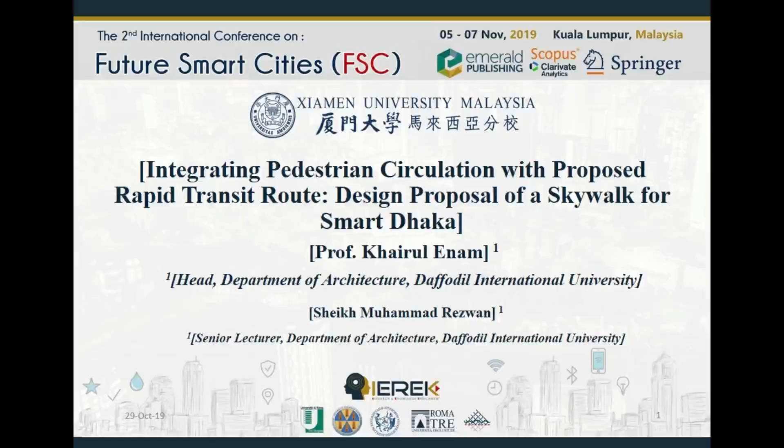We are presenting our paper, Integrating Pedestrian Circulation with Proposed Rapid Transit Routes: The Design Proposal of a Skywalk for Smart Dhaka. Dhaka metropolitan city has been developed as an unplanned city.

About 40% of its area is unplanned. Dhaka is the most densely populated megacity in the world, and Dhaka is among the least livable cities in the world, in the view of some experts.

As a result, the traffic speed has fallen to 6 km per hour, eating up about 3.2 million working hours per day. Finally, the result is that Dhaka city is going through a low productivity phase.

To improve the situation of traffic congestion, the city authority has taken some development works, like introducing metro rail, BRT or bus rapid transit, elevated expressway, and numerous flyovers to ease vehicular traffic congestion.

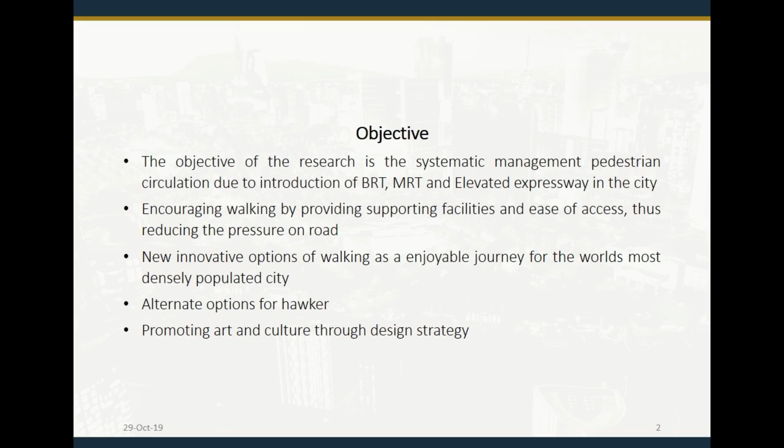What can be the achievement of cities and the quality of life? One of the essential features is how people move around them. Every trip begins and ends with walking.

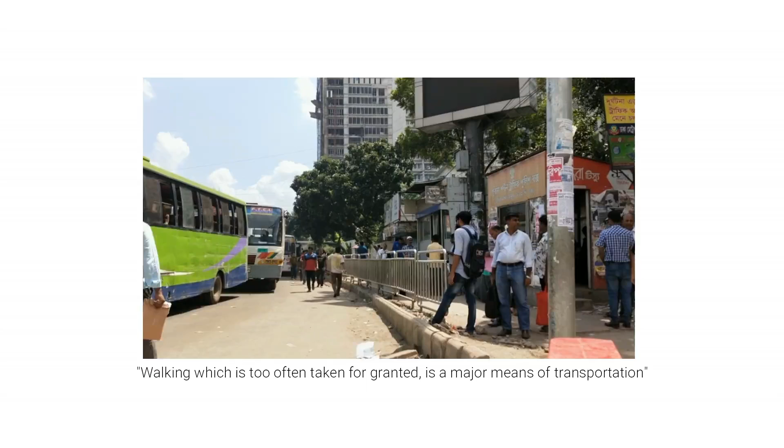Walking, too often taken for granted, needs to be considered as a primary focus among smart city features to see transformative change in towns and cities, many of which suffer from a legacy of being designed around cars. Besides health benefits, there are economic benefits, lowest carbon emissions, and it is the cheapest and most reliable mode of transport.

A skywalk is a type of pedestrian walkway consisting of an enclosed or covered footbridge between two or more buildings in an urban area. In North America, skywalks are usually owned by businesses.

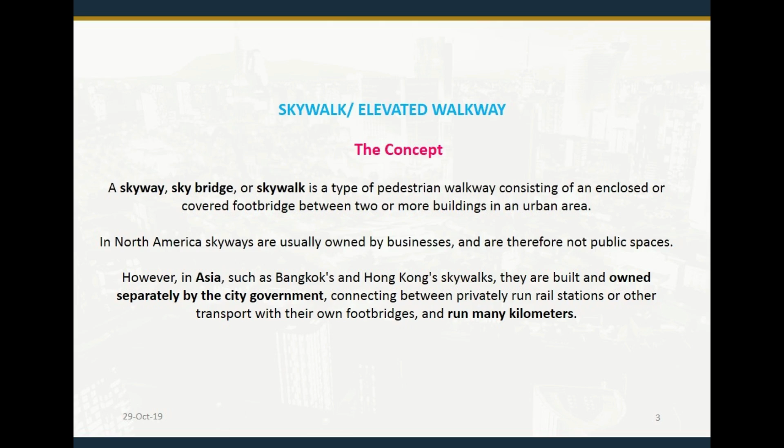However, in Asia, such as Bangkok, Hong Kong, Mumbai or Calcutta, skywalks are built and owned separately by the city government, connecting privately run rail stations or other transport with their own footbridges, running for many kilometers.

For the case study, we have chosen two skywalk examples: one in Canada and another in Asia, in Hong Kong.

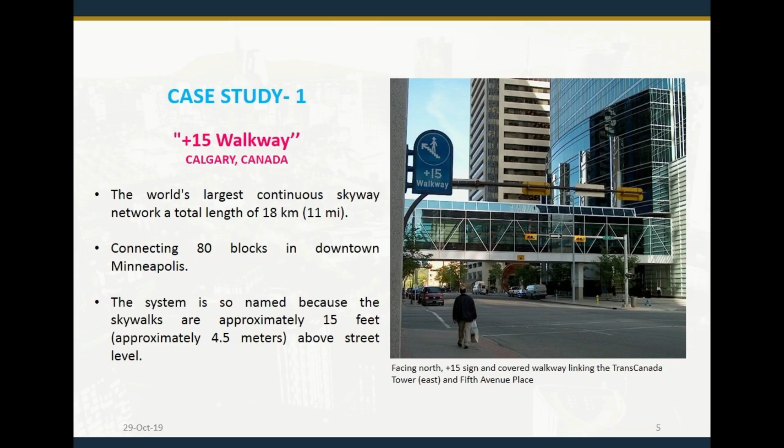The world's largest continuous skyway, Plus 15, is 18 km in length and connects 80 blocks in downtown Calgary, Canada. Within this network, 59 enclosed bridges connect dozens of downtown Calgary buildings. The central core of the system is a series of enclosed shopping centers and the city's flagship department stores.

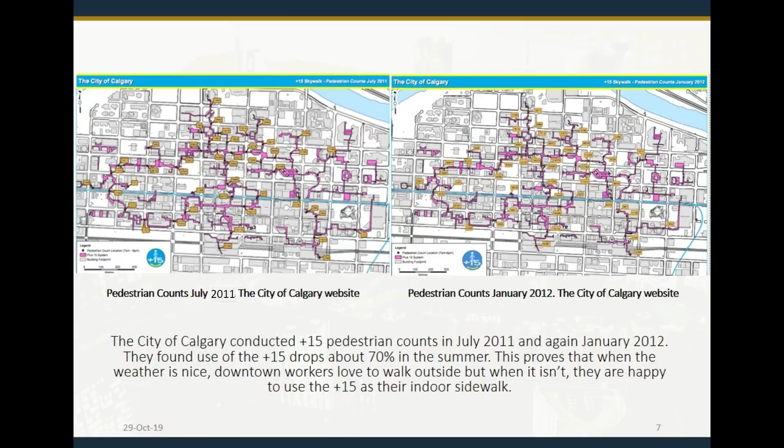Pedestrian counts in July 2011 and again in January 2012 show a 70% drop in users in the summer, which proves that when the weather is nice, downtown workers love to walk outside, but when it isn't, they are happy to use the Plus 15 as their indoor sidewalk.

The Central Elevated Walkway in Hong Kong is an extensive footbridge network spanning Admiralty, Central, and parts of Sheung Wan Harbour. The system was built in phases by the Hong Kong government and various developers, and has escalators and staircases for access. Parts of it are air-conditioned.

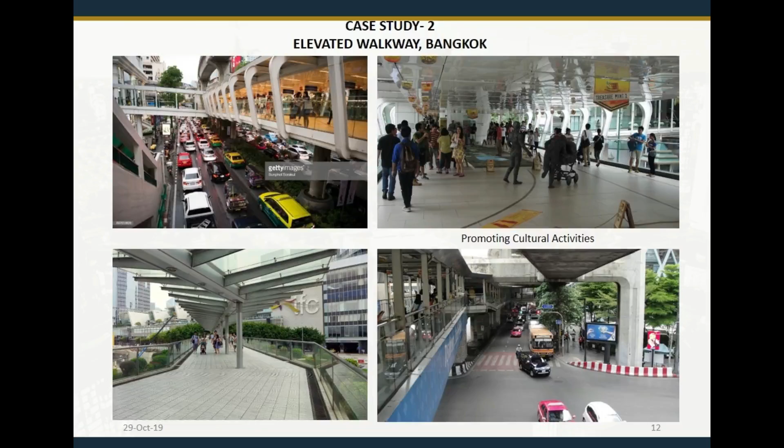There is a lot of debate about the negative impact of skywalks on urban areas, mainly negative impacts to street activities and reductions in property value at ground level, promoting consumerism and demanding more research into the impact of skywalks in developing countries. Researchers are working on this issue to make skywalks into public spaces. Our research will add another dimension to this effort.

If we now look at the BRT and MRT proposals in Dhaka city, we see there are 5 MRT and 2 BRT lane proposals in the revised strategic transport plan, to be completed within 2025 and 2035.

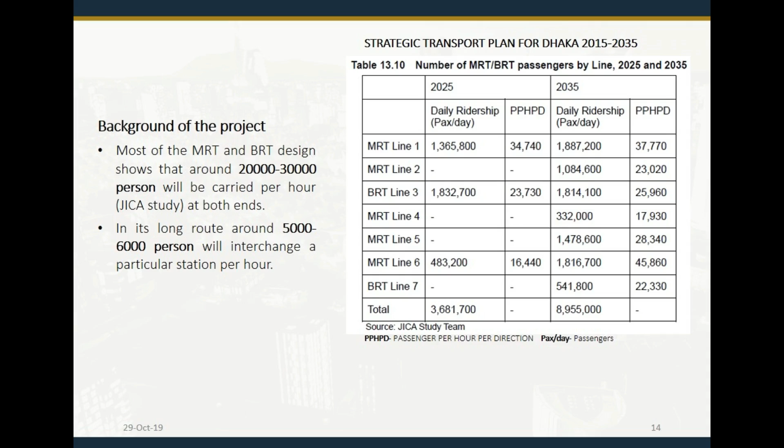A Japan International Cooperation Agency (JICA) study shows that 20,000 to 30,000 persons will be carried per hour at both ends of the MRT route. Along its long route, around 5,000 to 6,000 persons will interchange at a particular station per hour.

The design of this MRT station shows that all the passengers will come to the footpath, which is accidental because of our narrow footpaths and encroachment of the footpaths.

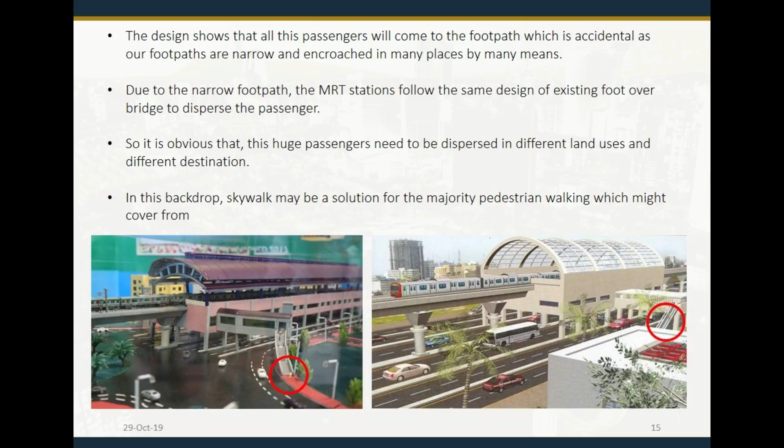Due to the short space in footpath, the MRT station strangely follows the same design of existing footover bridge to disperse the passengers. A highly used footbridge in Dhaka city carries 1,000 passengers per hour, according to the Daffodil Urban Studio Study in 2018.

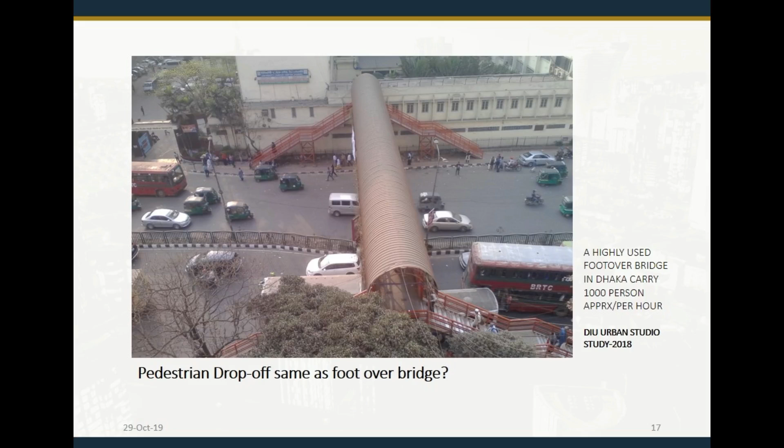So it is obvious that these huge numbers of passengers need to be dispersed in different land uses and different destinations. In this backdrop, a skywalk may be a solution for the majority pedestrian walking, which might cover from very short distance to long distance.

Now, if we come to our study area in Newmarket, Nilkhet area, we shall see there is a proposal of 10.5 kilometer long 6-lane expressway, which will be constructed over Mirpur Road. The area is famous for shopping, especially for ladies' garments, fabrics, knitting accessories, and people from all around Dhaka and even the suburbs of Dhaka come here for shopping.

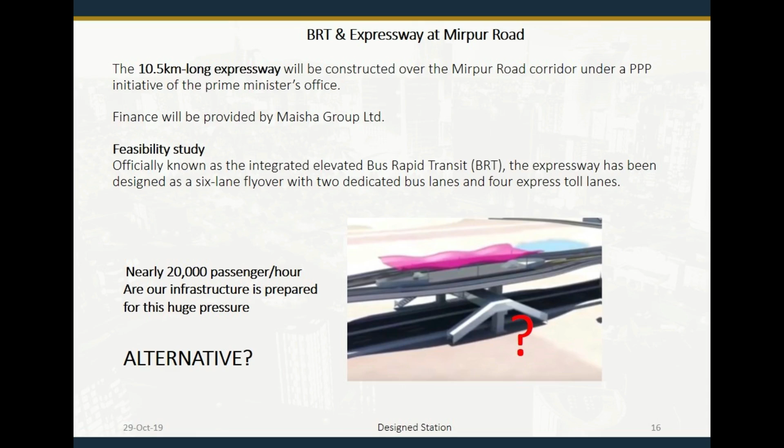There are many educational institutions, public university and colleges within 1 kilometer radius. The station is supposed to be at Nilkhet node, so the existing area needs to be analyzed.

So students of the Daffodil International University started surveying the area for 1 week in the month of September, and 12 students were involved in photograph taking, video documentation, interview, structured observation, etc.

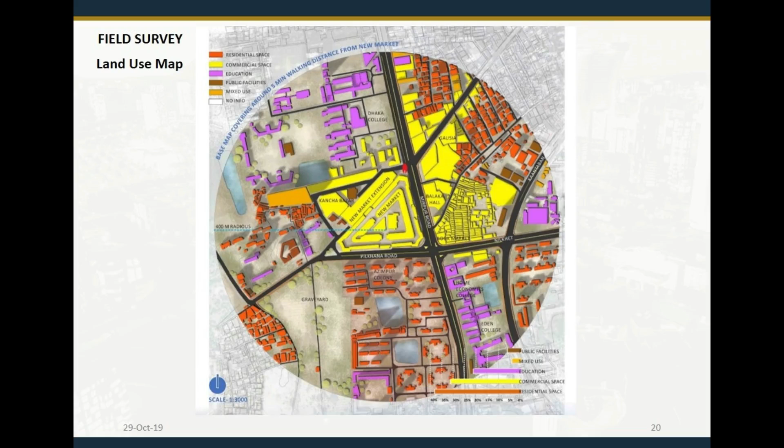Land use map of the area shows that the dominant land uses are residential, shown in orange color, commercial in yellow color, and institutional in violet color. So the shopping area entrance from the residential colony and educational institution should get priority during the proposal phase.

The traffic analysis shows that the primary road is over pressurized due to the huge pressure of cars. Newmarket has no car parking, so cars park on the street side, and drop off and pickup happen on the same main road. The whole study area is crowded with street hawkers or vendors.

The adjacent shops along the street rent this front space to the hawkers. The footpath becomes overcrowded from afternoon till 8 p.m. If you look at the image, you shall see the density of population on these footpaths.

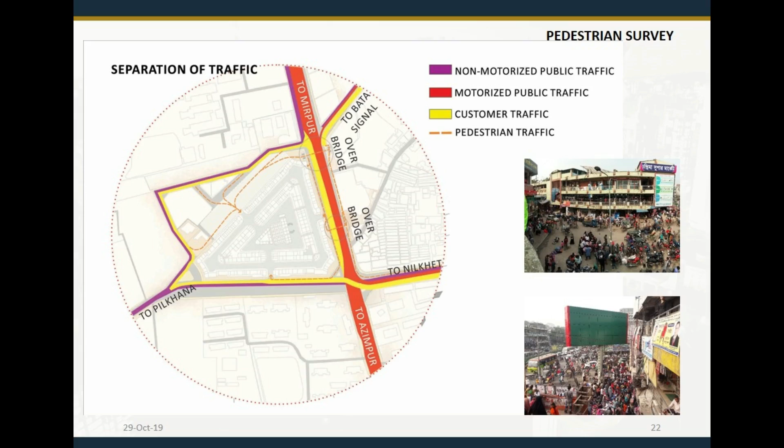So if we again disperse the MRT passengers onto this footpath, then what will happen? We can see a proposed condition after the MRT is done. Different sexual incidents also happen within this footpath with the girls because of this clumsy situation.

Though hawkers is a political or social issue, in the design phase, if something can be done for them, it will ensure more value to this project.

We are proposing a Skywalk, which is very simple, and it could be linked with any other shopping areas or all the shopping areas. It could be linked with that, and people can move easily from one place to another without crossing any road.

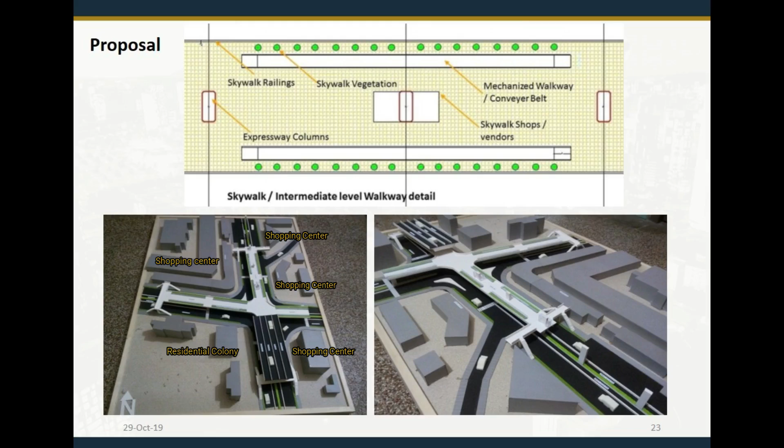In Canada, Thailand, and the USA, skywalk has been implemented as the best solution for pedestrians.

The proposal of the Skywalk is trying to integrate the MRT and BRT Expressway. The huge columns which have been used as a structural member can support it without extra columns. We are using the metro and BRT expressway columns as a support, so that no extra column is required for that.

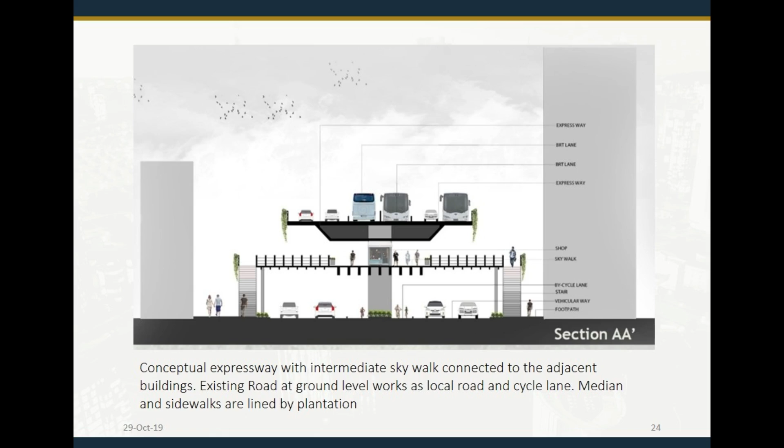To do that, a little change will come in the design of the expressway columns. It will need an extra 9 feet height to accommodate the skywalk. The skywalk height will be at the same level as the footover bridges.

The moving walkway and the fan can be provided in the skywalk for comfortable journey of the elderly people and children.

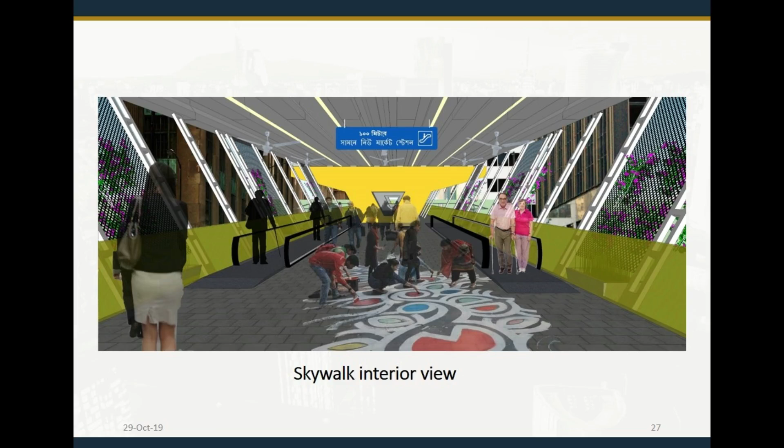The skywalk can offer a vibrant lifestyle by providing different civic functions along its way, such as restaurants, parks, bookshops, play zones, music, etc. could be accommodated in the skywalks. The government can play a vital role in deciding the proposed function in different zones of the walkway.

The existing buildings may provide urban services and amenities for creating a vibrant environment. The skywalk may promote art and culture through design endeavor.

Small kiosks can be provided by the city corporation to accommodate registered hawkers using both sides of the path.

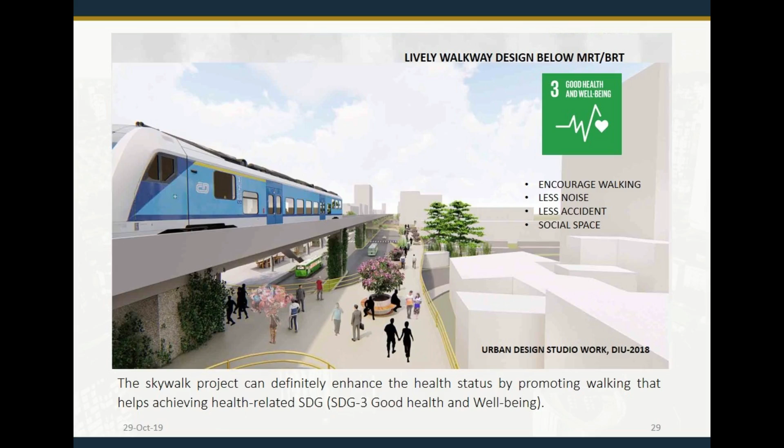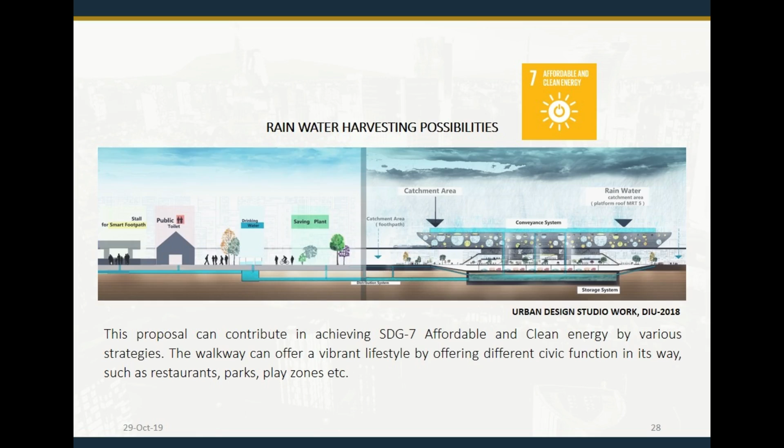Bangladesh is moving forward to achieve Millennium Development Goals and also targeting Sustainable Development Goals by 2030, when Dhaka will be the 4th largest megacity in the world. The proposed skywalk can help in achieving that vision.

To materialize the vision 2030, pedestrian circulation should get priority in generating the future smart city. Thank you.